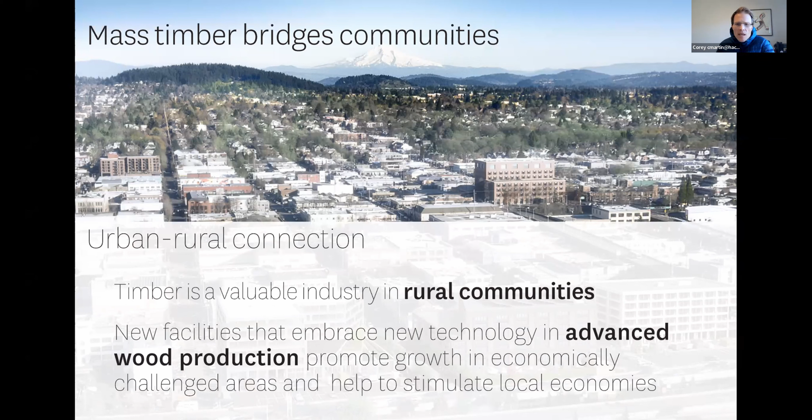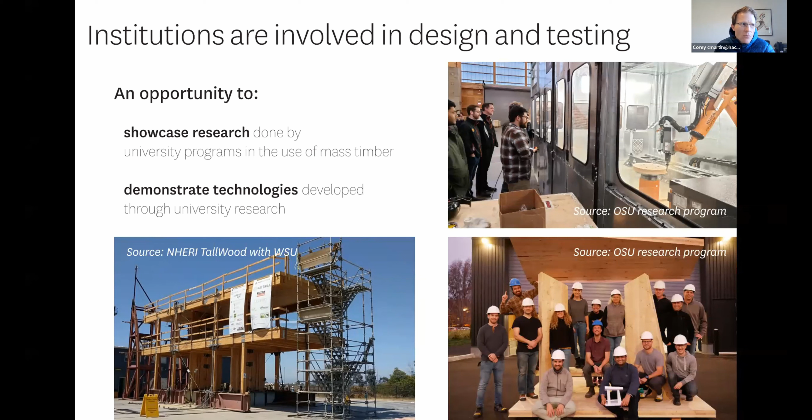The institutions we work with are also involved in the design and testing. Again, Guido's presentation is paramount to that. There's all this research being done in all these different places that we already have as clients, and they're passionate—their wood research programs are actively working on how to integrate these products into buildings, doing testing, and working with manufacturers to develop better ways of doing things.

As we all know, but it's important to highlight for the academic world, mass timber is proven. We know it at our core, but there's also data showing that being in a space elicits a biophilic response from everyone that's actually testable—there's a physical and psychological measurable benefit to working within a space built out of wood, or that has a large visible part made from wood.

There was a debate going on, a chat, about how much energy is really embodied in all these materials. I'd love to get to the bottom of this. When we're working with Scott Ellert in California on his fabric product, we're helping him design that, and we're talking about California's perceptions about embodied energy in their materials, where they're sourcing materials, and how they can use material that's just sitting there and going to waste.

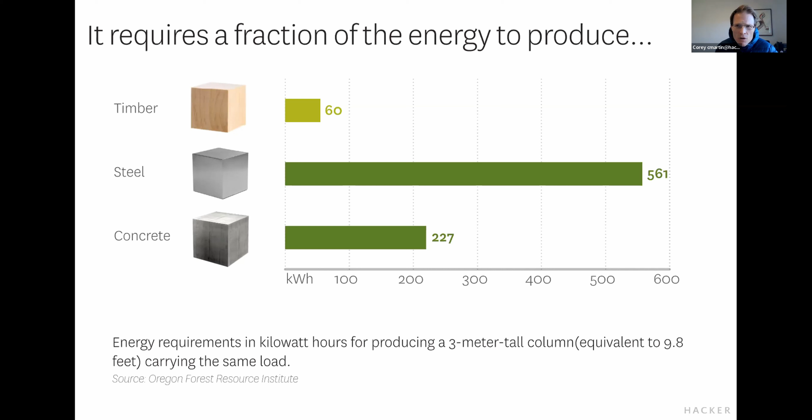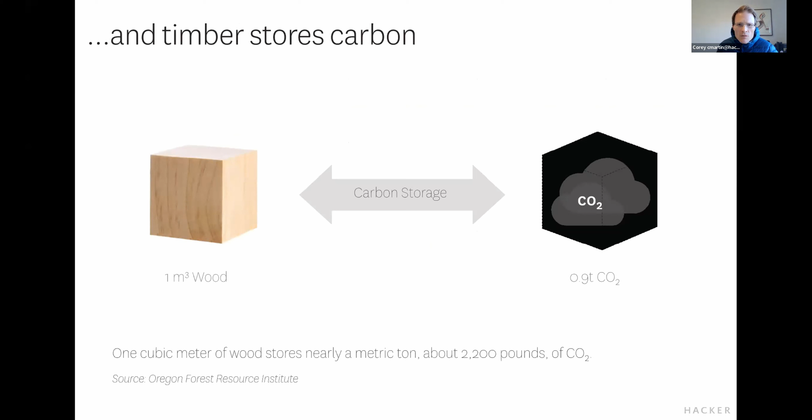It's really important, and the big point here is that generally speaking, we're pretty convinced that the same material, the same element or piece of a building—a column or whatever—built out of timber, uses way less energy overall than a similar element made out of steel or concrete. And timber stores carbon—it's the only renewable building material, and every chunk of timber we use is sequestering an amount of carbon that has an impact beneficial to climate change.

Something really important for these types of buildings is that the structural system needs to be different because of the spanning capabilities of the materials we're working with. So we're not working with normal structural grids, like 30 by 30 grids in steel or concrete buildings. Instead we have narrower grids in one direction and longer spans in the other, maybe 30 or 40 feet, creating a nimble structural bay that can be really flexible. It can be scalable more easily, and adaptable.

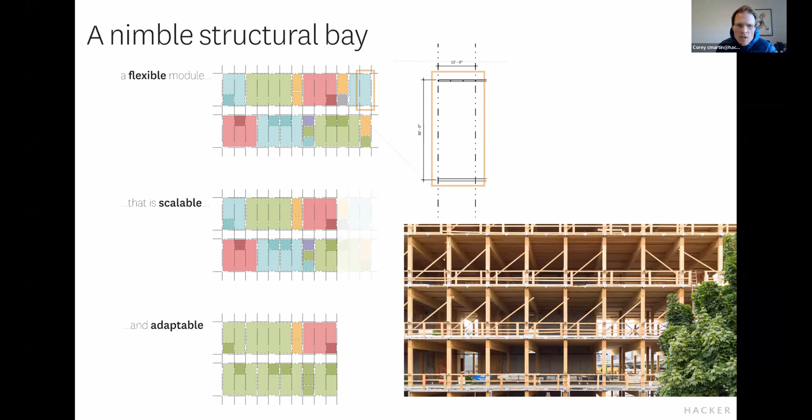It can be phased more easily. Because it's small, the module of additional bays is smaller. It doesn't take up as much space. It's a really, really clear, blank, beautiful slate.

This is a rendering showing a fundamental layout we've been developing over several projects, where we have a long span in one direction and a short span in the other. Say a 30-foot or 40-foot span in the long direction, supported by big, deeper glulam beams, and then CLT or mass plywood spanning the other direction at say 10, 12, or 15 feet. It all depends on the building, what you're trying to do, and how efficient you're trying to be with the wood fiber.

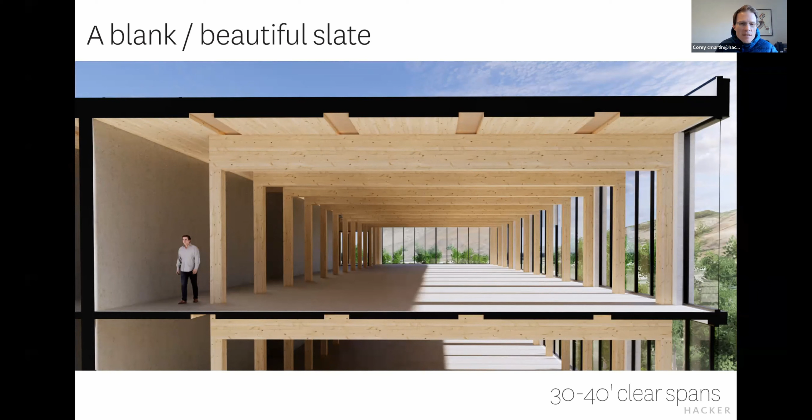You can see on the left in this image that open space—we call that section the colonnade. We typically use that section for running mechanical systems, then run those ducts and piping out into each bay, visually screening them along this sight line. You can also see the little notches in the ceiling, where we've spaced apart the structural panels to allow smaller mechanical elements to run through: sprinkler piping, data lines, electrical conduit.

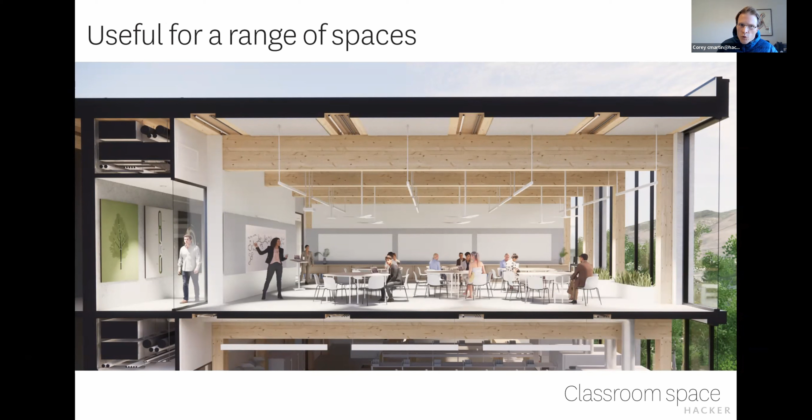These types of layouts are really useful for a range of spaces. For classroom spaces, you can see the circulation of the hallway on the left, and how mechanical systems are integrated between the panels on the ceiling, with lighting dropped into those spaces. A side benefit of this structure: on the right you can see the window head goes all the way to the ceiling, because we don't need a perimeter beam. So we can wash light seamlessly into the space, reducing glare and making these really pleasant spaces to be in.

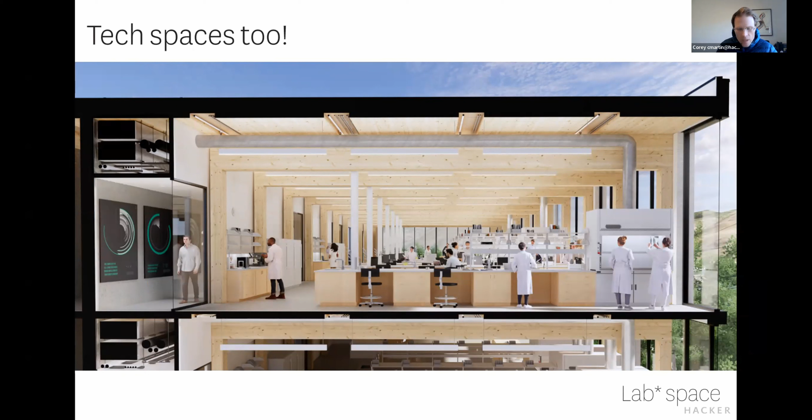Something really important to know is that you have a light building. They're lightweight buildings, much lighter than concrete and steel buildings. You have a light and fast crew.

What's really interesting is our First Tech building—150,000 square feet—took a 7-person crew and 1 crane operator 12 weeks to assemble the structural frame. It was almost dead silent on the site, relatively speaking.

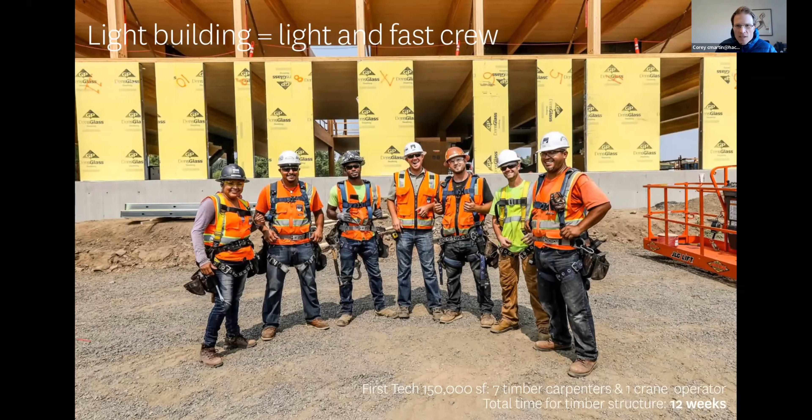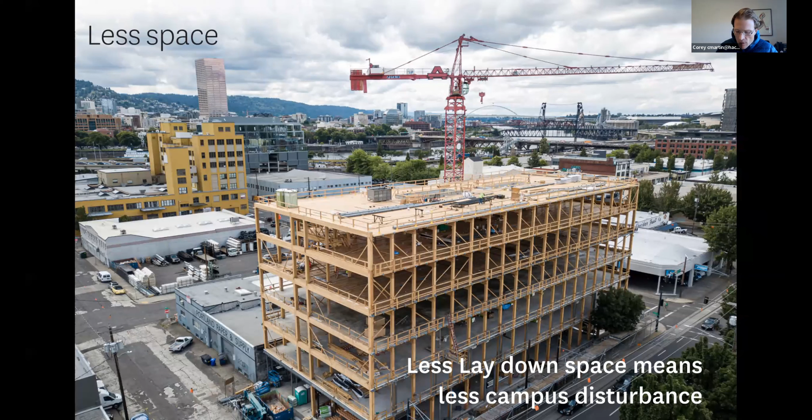So it takes less space. For tight sites and campuses where you don't want to interrupt people and activity around the building, it takes less space because you have less laydown space. It's a really peaceful, quiet, relatively construction site.

When I went out to the First Tech site during construction, I took my son out there. He was really young at the time, but he said, 'Is this a construction site? This looks like a park.' It's really amazing how different it is, how quiet and efficient it seems. It's really clean too—just a beautiful construction site.

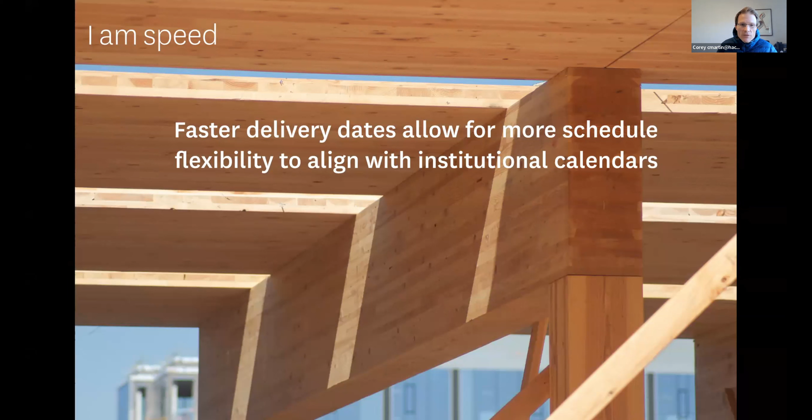It's really fast. To quote Lightning McQueen, faster delivery dates allow for more schedule flexibility to align with the institutional calendar. So all these types of projects can benefit from more precise planning of when they can occupy their buildings. If you do it right, just like we did at First Tech, you can build a building that's 4% less expensive and 4 months faster than the equivalent steel building.

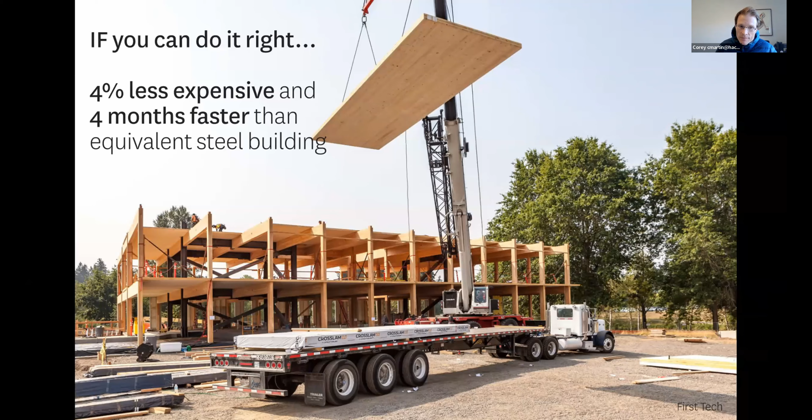Some important things to know: first, it's not just beautiful, it's a 3-in-1 system. Number one, it's the structural system. Number two, it's also its own fireproofing. Number three, it's also its own finish. So you're saving money if you design it right by considering this reality.

You don't have to fireproof your structure, you don't have to finish it—what you see is what you get. It's beautiful, structural, and it's complete. But you've got to plan for that.

People want to touch it—people want to touch everything in the building. We've been doing mass timber buildings for a long time, and we've been going back and photographing what happens to them over time. One of the things, in addition to touching, is that furniture and other objects impact the buildings.

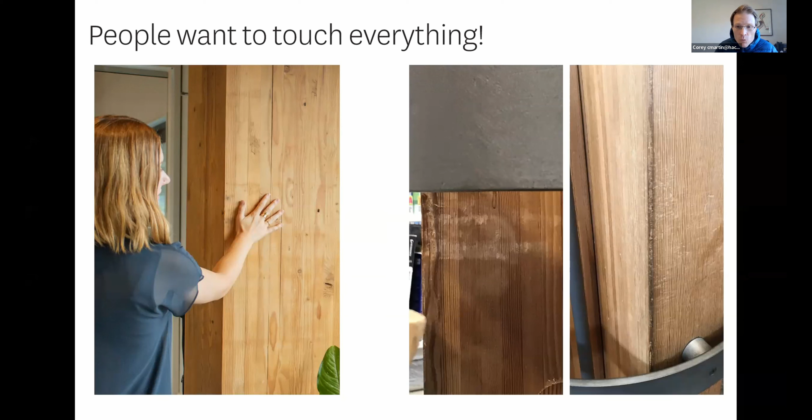You can see on the right side here, this is the Hillsdale Public Library in Portland. You can see some damage that's been done from chairs that were higher than the chair rail we installed, which you can see on the lower right. So you've got to plan for that.

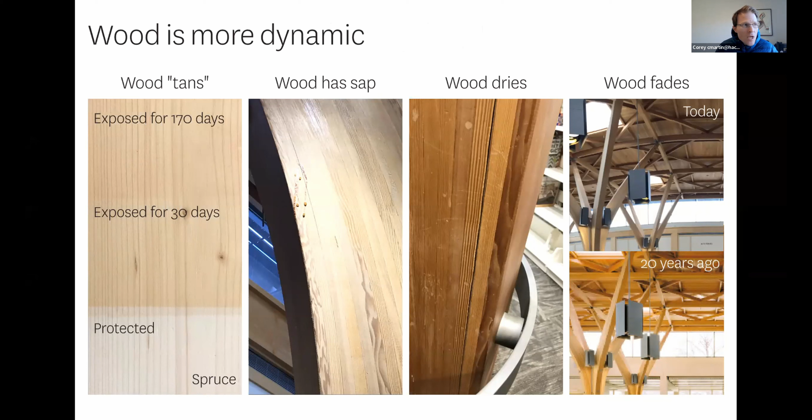Wood is more dynamic—it tans, it has sap in it, it dries, and it fades. It changes over time, so we've been documenting and looking at how these things change. It's not any less beautiful, but making sure you share with your clients that this is going to change is really important.

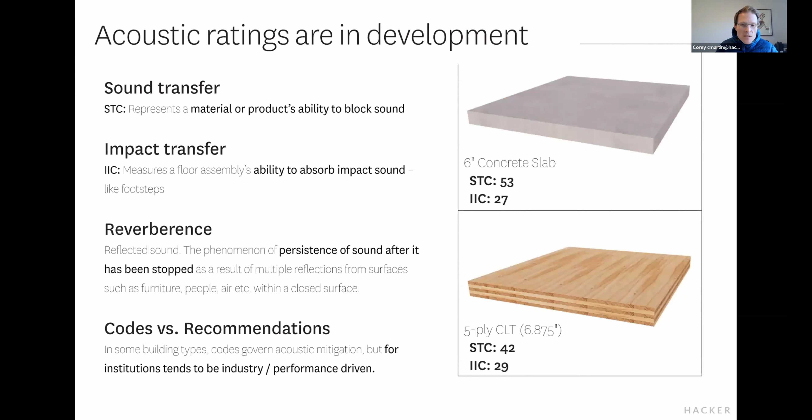Acoustic ratings are still in development. There aren't as many tested assemblies for how you mitigate sound transfer—all types of sound transfer from one space to the next. So you've got to know it's important to work with an architect and a builder who understand that and understand how you're going to mitigate sound, because it's going to be a little bit different.

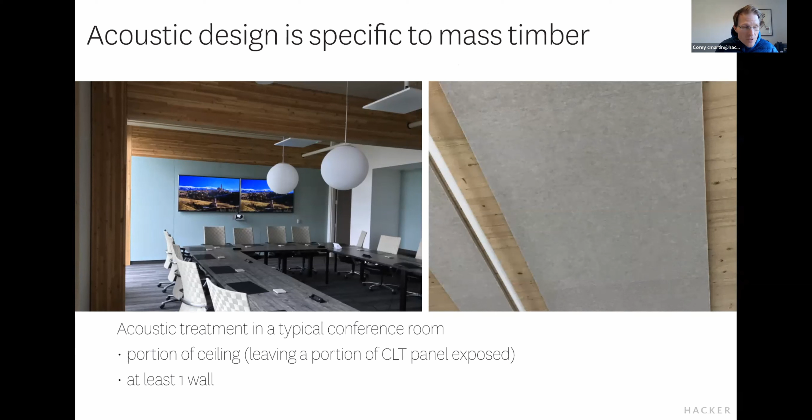Acoustic design is specific to mass timber. We do it in different ways because if you want to expose your wood, it also happens to be a reverberant surface. So acoustically, you've got to think about that and plan for it.

Mechanical systems can really inform the layout. You can see these four examples: on the upper left, the conventional under-the-beams system that normally happens. Below that, the beam and purlin system where the mechanical can go over the beams. We've done the two on the right in mass timber buildings to try and mitigate penetrations through these structures and make the structure as integrated with its mechanical system as we can.

The raised access floor on the right, we did that at the First Tech office building that I shared. And on the lower right, you can see this one-way beam and colonnade system. That's the system we're favoring right now for a lot of reasons. It's more integrated, visually more screened, and also less expensive than a raised access floor.

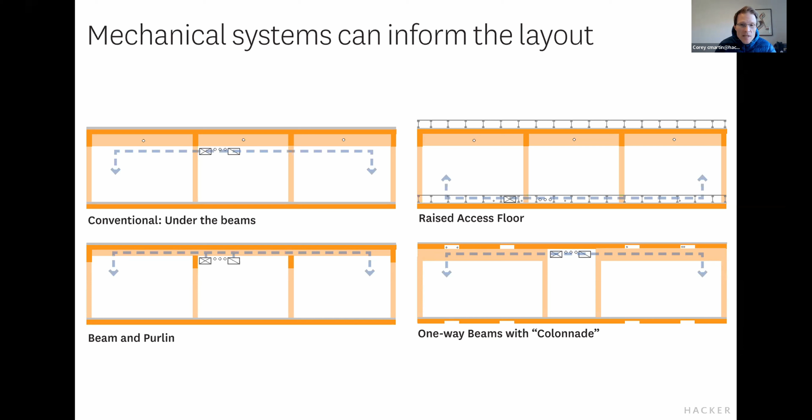The lateral systems you can work with need to be considered differently. Right now there aren't that many that are cost effective, and steel brace frame is really what we've been leaning on. We've done concrete shear walls too, but given the loads, sizes of these buildings, and the seismic zones we're working in, those two systems tend to float to the top.

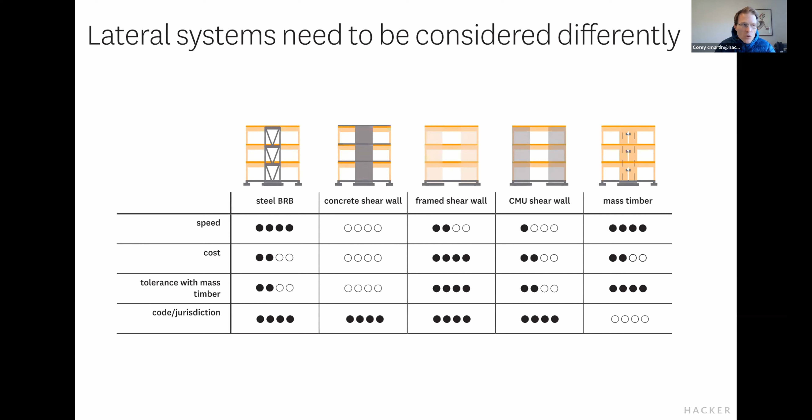We want to push for an all-wood lateral system. As people probably know, that's in testing right now, and a few buildings have done it. It's only a matter of time before we can easily build an all-wood lateral system.

You've got to follow the changing code. Just as Gita was mentioning, it's different in Canada than here. In the US, the proposed new code allows higher buildings with more exposed wood, and the next code coming out in a few years will allow even more exposed wood. Oregon and Washington are early adopters, and these codes have currently been adopted here, which is what's allowing us to do what we've been doing.

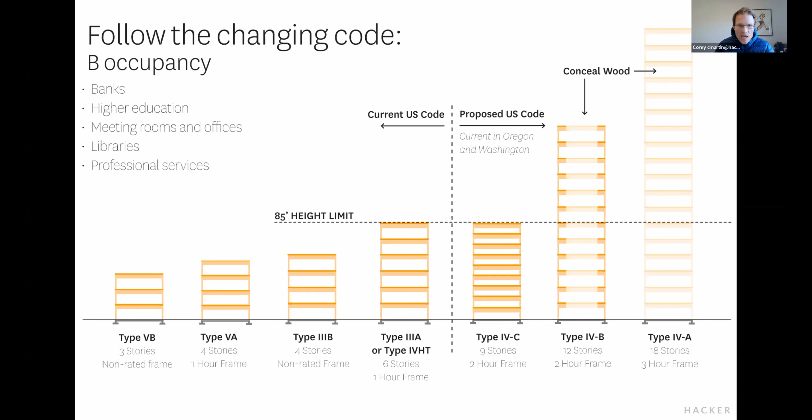It's only a matter of time before that's adopted by more states. Then there'll be another code revision that will take a bit of time, but that will also be adopted. So it's looking really good.

Modeling is critical. You've got to have the right contractor, and you've got to model everything. Really coordinating your mechanical penetrations and how you lay out your mechanical is important. At the First Tech building, we had over 4,000 holes pre-drilled in all of the structure, and not a single mistake.

Amazing. And I owe that to the work between the entire team. Eric is going to talk about that next, but it's because of that type of collaboration that we're able to do these things efficiently.

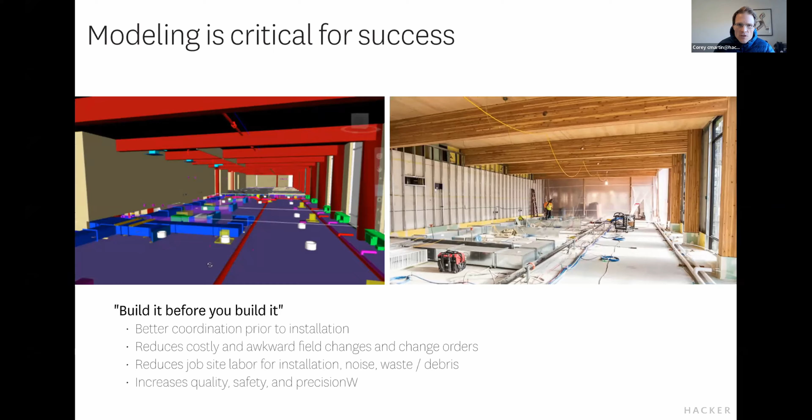Getting back to Guido's point about technology helping us make these things possible, the contractor is your partner. The ability to prefabricate and mass customize these components before they come to the site is really important. At the First Tech building, which at the time was the largest mass timber building in the United States, we only had 4 columns machined incorrectly, and Structurlam got them to us remachined in a couple of days.

It's amazing, but we still have a lot of work to do. This diagram on the right shows a study we did for a big project in San Francisco, the Pier 70 project. It was going to be the largest mass timber building in the US. It's been put on hold, but it was 320,000 square feet, working with Swinerton on that project.

You can see in this diagram that the timber is only part of the impact on the amount of carbon released in building these buildings. So what do we do about that? We've got to think about it. There's still steel in these buildings, there's still concrete in these buildings. And the source of that wood also makes a big difference.

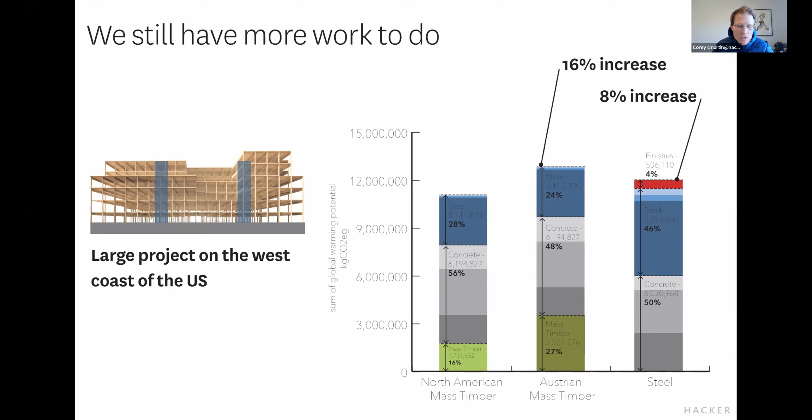We did a pretty in-depth study comparing the sourcing of timber for that building from a domestic US source versus getting it from Austria. It increased the impact big time, just from shipping and all the work to get that material to the site. You've got to understand that the supply chain is evolving.

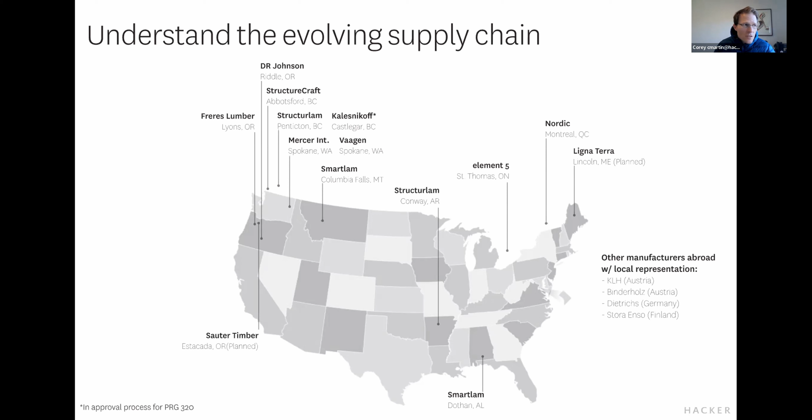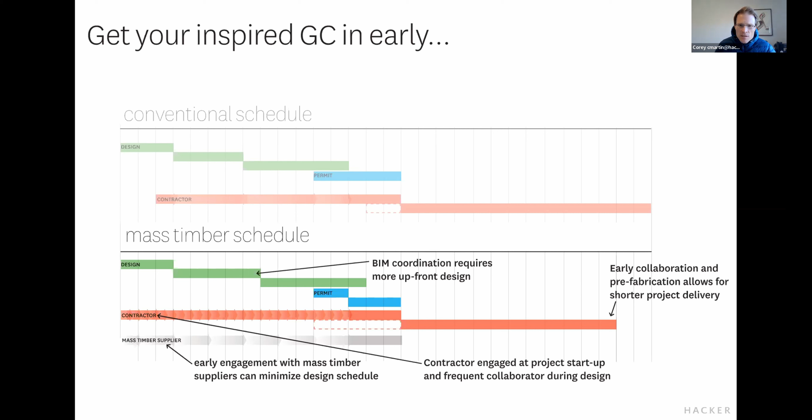So I think it's really important to emphasize that you've got to get an inspired general contractor that's excited about mass timber, that's ready to be a true partner, and you got to get them in early. This doesn't work unless they start on day one. As soon as you start designing, they're in the room with you talking about this project, because they have got to work hard up front to manage all the supply chain and to be able to achieve the schedule benefits of mass timber and prefabrication.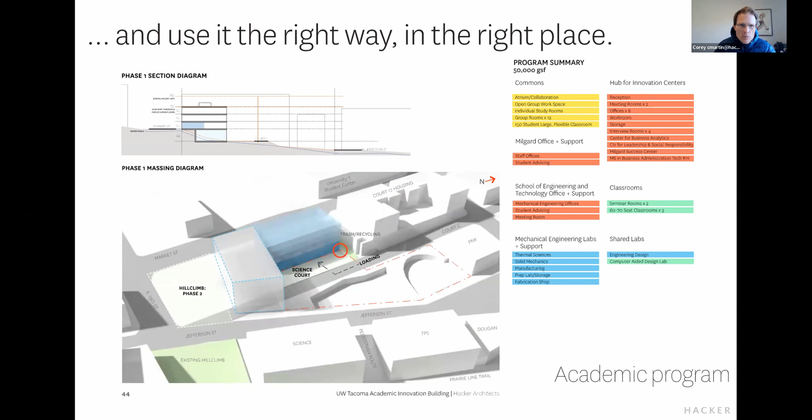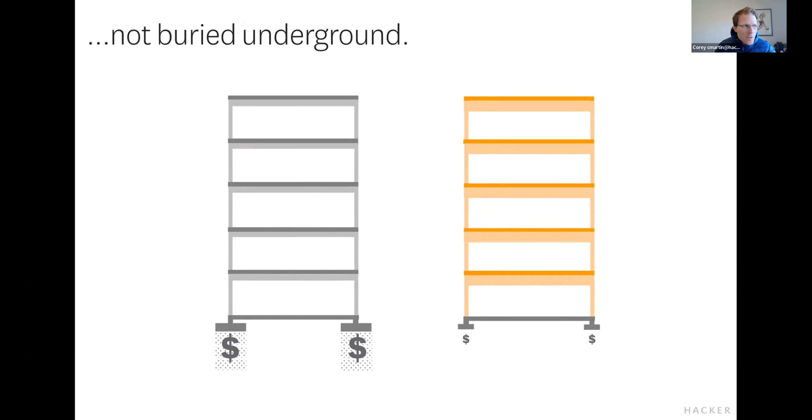So you want to put the money where you want to see it. The mass timber structure probably costs more than the alternatives of steel and concrete right now, but who knows, with the way things are changing all the time. You just don't want to bury that money underground. It's a lighter building, so the heavier concrete and steel structures end up putting a lot more of your investment into things you can't see, like foundations.

So I went through that as quick as I could. Thanks for your time. And if anybody has any questions, I'd love to hear it.

Am I good? Can you hear me? Yeah. Okay. So we have a couple of questions, Corey, about LCA. I think we'll save those for the end because it's part of the larger question I have for the panel discussion.

The connection for me, I think that you hit on that was really interesting and that we talk about a lot too, is the jobs and government. And with the new European Bauhaus, the Green European Deal, a number of jurisdictions in Europe, I think British Columbia as well, have started pushing the utilization of wood as part of a component of climate protection. And I think you're starting to see that on the West Coast. Are you in discussion? Is Hacker in discussion with jurisdictions or anybody of that nature on things like this?

Yeah, absolutely. I think near Portland, Clackamas County is a big one, and they're really investing in their infrastructure to try and build capacity for producing CLT and other mass timber products. And so we have been in meetings with them and helping them understand what we know. And then also we're learning a lot from them about how they see their supply chain and the harvest working. And they've been giving us tours of their timberland and with their timber managers. And so it's a kind of a collaborative effort there.